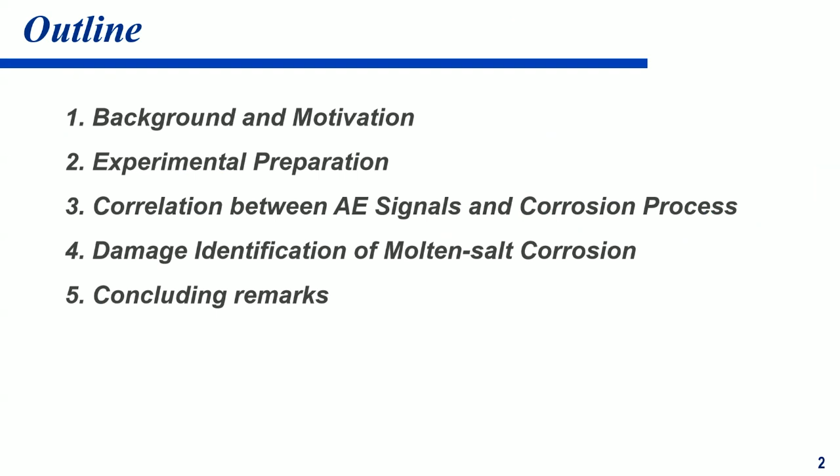Firstly, I will show our background and motivation behind monitoring the molten salt corrosion, and then I will introduce the experimental preparation of the monitoring system. Then I will give the relationship between the AE signals and the corrosion process, demonstrate the damage identification of molten salt corrosion. Finally, I will give the concluding remarks.

As we know, the molten salt thermal storage technology originated in the 1960s in the United States. China since introduced this technology and constructed numerous plants. And the high temperature molten salt technology is in high demand for applications, including molten salt reactors, concentrated solar power plants, and the flexibility retrofits for thermal power plants.

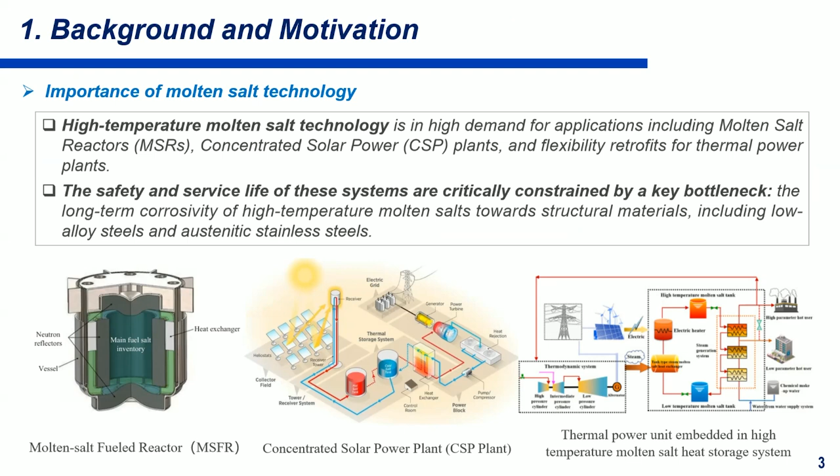The safety and the service life of these systems are critically constrained by a key bottleneck, namely the long-term corrosivity of high-temperature molten salts towards structural materials, including low alloy steels and austenitic stainless steel.

Molten salt storage tanks operate under harsh conditions. The material of the molten salt tank with a lower temperature of 290 centigrade is Q345R. With a higher temperature of 565 centigrade, 347H. The latter lies within the sensitization range. It is a large structure with numerous complex welds and designed for 25 to 30 years. It is hard to apply inspection in service.

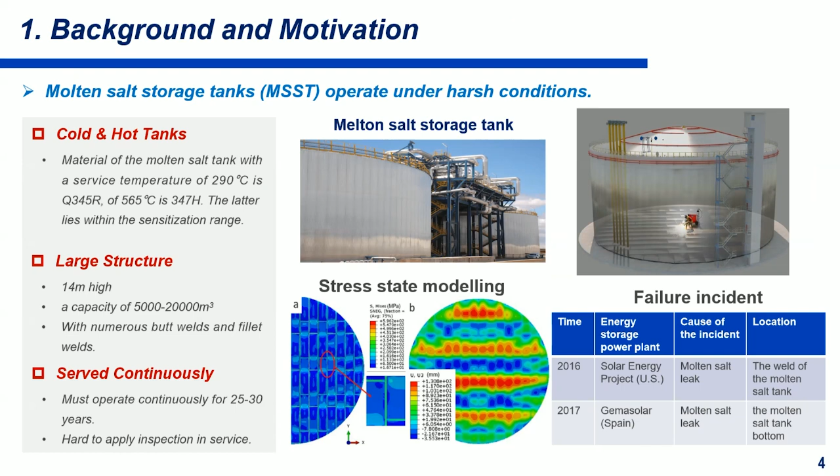So we do the research on in-service monitoring. Monitoring damage during service of the molten salt tank is a major challenge, and acoustic emission technology can offer in-situ, real-time, and continuous damage monitoring.

But there are also some challenges. The first one lies in extracting the signals in the very complex, noisy environment. And the second one is how to assess the damage of the material in the molten salt environment.

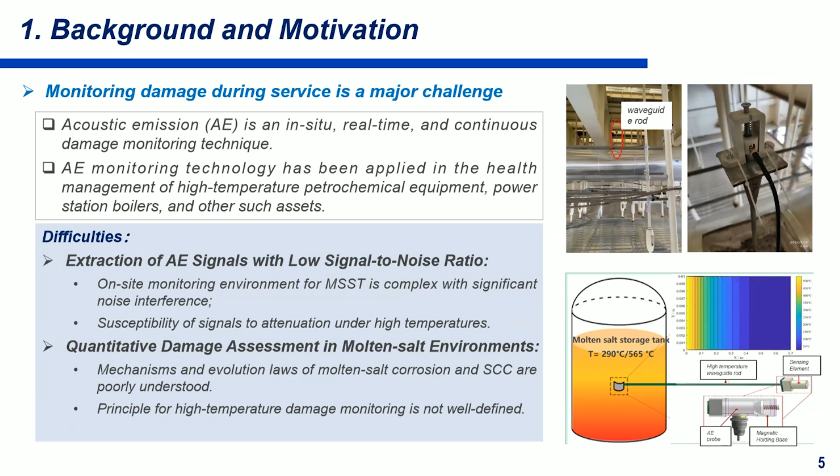It is very hard. And we construct a molten salt corrosion AE monitoring system, just like this. And this is a design drawing. And we use a waveguide rod so that the temperature is not very high for the AE sensors. The unprestressed and prestressed corrosion specimens were fixed to the waveguide structure using bolts and nuts, respectively.

The material of the high temperature waveguide rod must be consistent with that of the molten salt storage tank to prevent galvanic corrosion. The required waveguide rod length was calculated using the heat conduction equation that accounts for convective heat transfer.

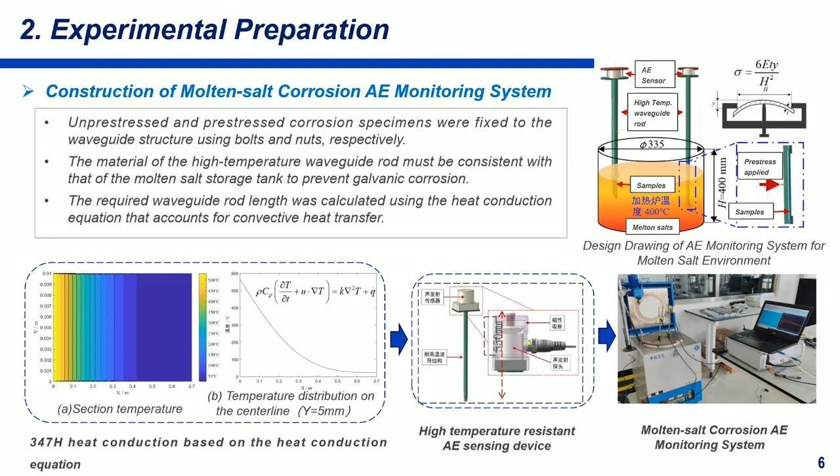When we apply the molten salt corrosion test, the corrosion mass loss of 347H under different stress increased rapidly initially and then slowly with time, with the overall trend approximately a parabolic curve.

The corrosion rate of 347H under different pre-stress initially increased rapidly, then decreased quickly, followed by a slow decline, reaching a peak around 250 hours. During the initial stage, the unstable oxide film accelerates corrosion. The slowing increase in corrosion mass loss and the decrease in corrosion rates after 250 hours can be attributed to

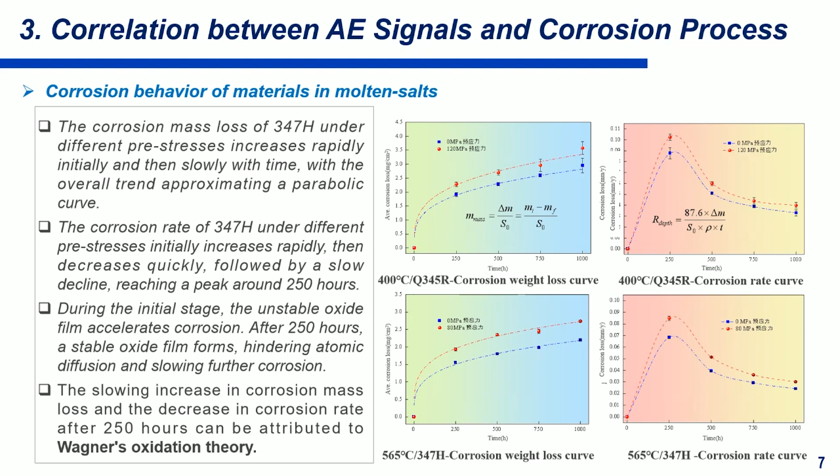Wagner's oxidation theory. As shown in Figure 1 and Figure 3, the data for corrosion mass loss versus cumulative energy were fitted using different models. For the 0 megapascal and 120 megapascal pre-stress conditions, linear and nonlinear equations were applied respectively, yielding coefficients of determination of

0.957 and 0.978. In contrast, linear equations were used for both the 0 megapascal and 80 megapascal conditions, resulting in R square values of 0.972 and 0.947 respectively. All models indicate a good fit and positive correlation between the variables.

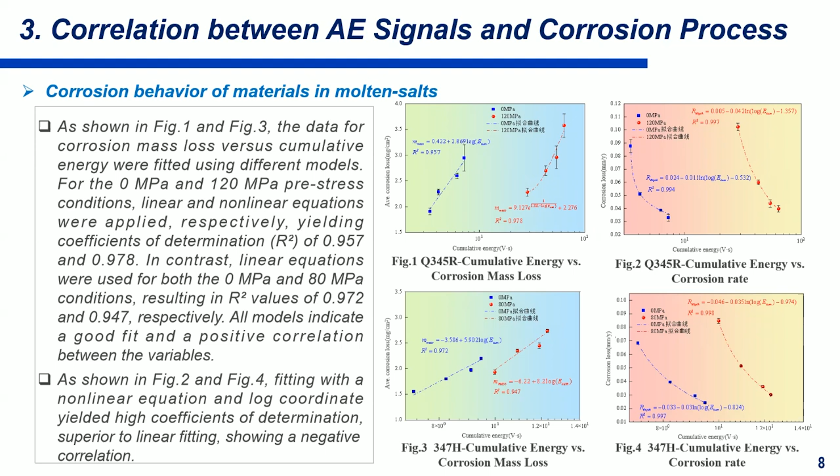As shown in Figure 2 and Figure 4, fitting with a nonlinear equation and log coordinate yielded high coefficients of determination, superior to linear fitting, showing a negative correlation. And there are three stages in this test.

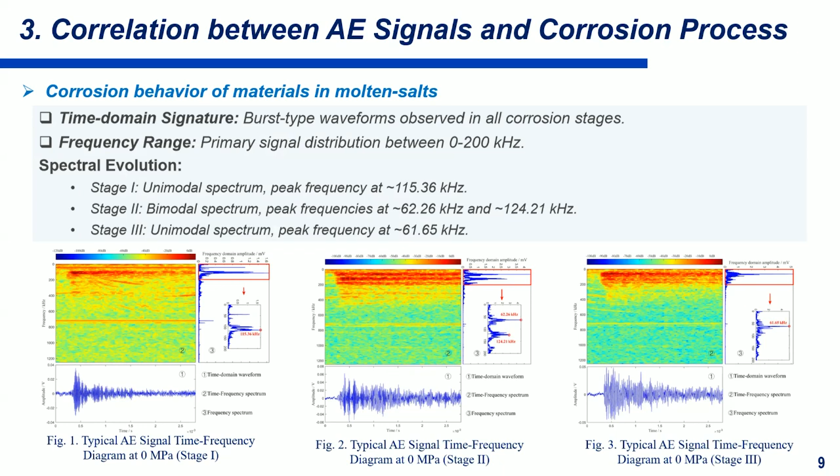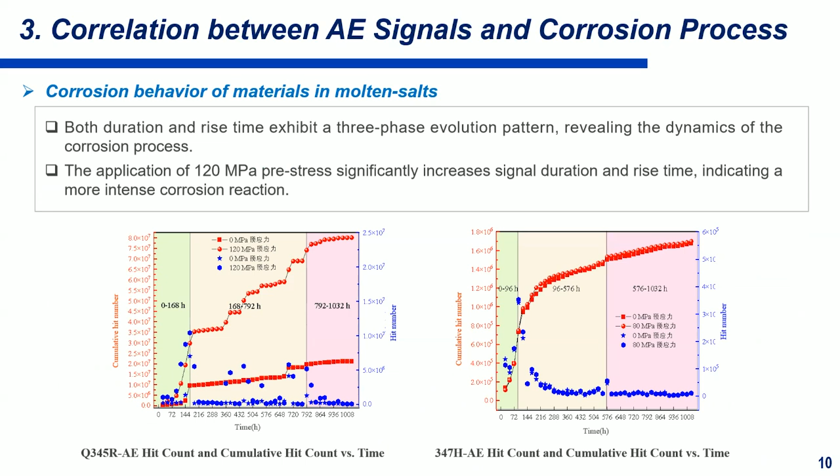Both duration and rise time exhibit three-phase evolution patterns, revealing the dynamics of the corrosion process. The application of 120 megapascal pre-stress significantly increased signal duration and rise time, indicating a more intense corrosion reaction.

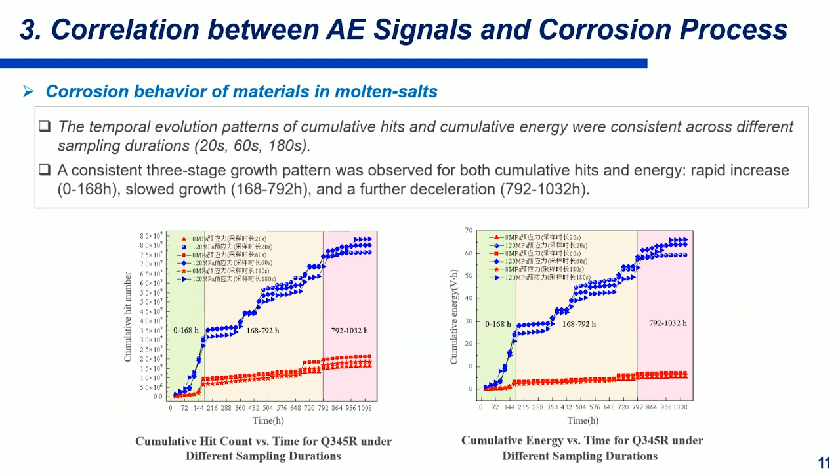The temporal evolution patterns of cumulative hits and cumulative energy were consistent across different sampling durations, namely 20 seconds, 60 seconds, and 180 seconds. A consistent three-stage growth pattern was observed for both cumulative hits and energy: rapid increase, slow growth, and further deceleration for 792 to 1032 hours.

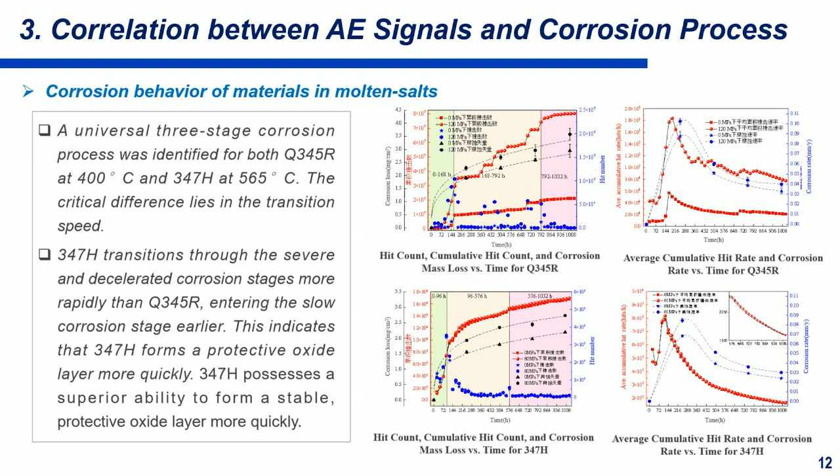A universal three-stage corrosion process was identified for both Q345R at 400 centigrade and 347H stainless steel at 565 centigrade. The critical difference lies in the transition speed. 347H stainless steel transitions through the severe and decelerated corrosion stages more rapidly than Q345R, entering the slow corrosion stage earlier. This indicates that 347H possesses a superior ability to form a stable protective oxide layer more quickly.

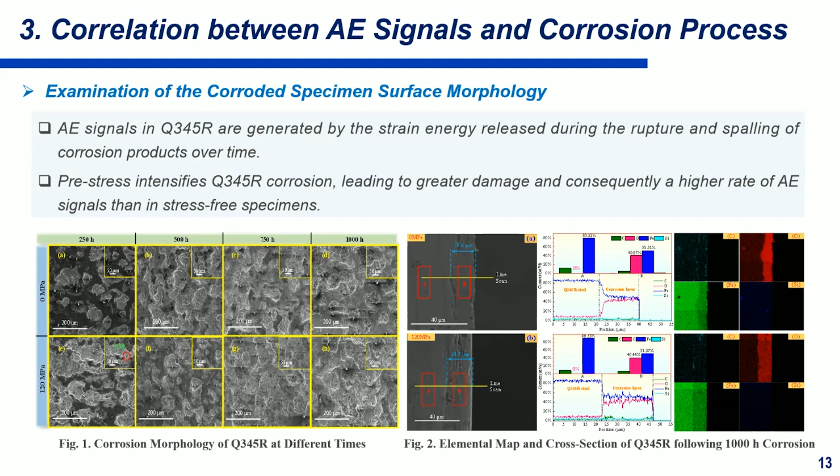When we check the morphology of the corroded specimen surface, AE signals in Q345R are generated by the strain energy released during the rupture and the spalling of the corrosion products over time. Pre-stress intensifies Q345R corrosion, leading to greater damage and consequently a higher rate of AE signals than in stress-free specimens.

And when we check the relationship between the AE signals and the molten salt corrosion, the energy release rate of the unstressed specimen remained at a low level during the 0 to 480 hours period. At this stage, a relatively complete protective oxide film may form on the material surface, resulting in slow corrosion progression and no strong AE source.

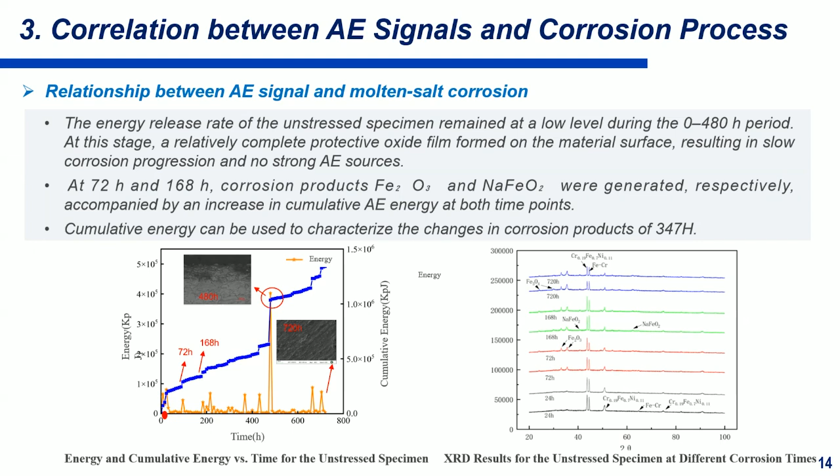At 72 hours and 168 hours, corrosion products, iron oxides and sodium iron oxides, were generated respectively. Cumulative energy can be used to characterize the changes in corrosion products of 347H stainless steel.

Classification of AE signals in molten salt corrosion stages based on AE characteristic parameters. The molten salt corrosion process of Q345R steel at 400 centigrade was divided into three typical stages. A total of 1,500 burst type signals were equally selected from these stages, with pre-trigger data retained and no overlap between signals.

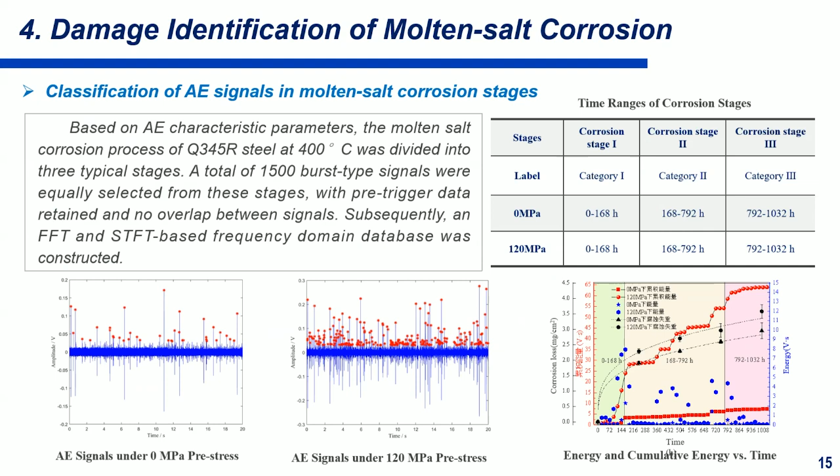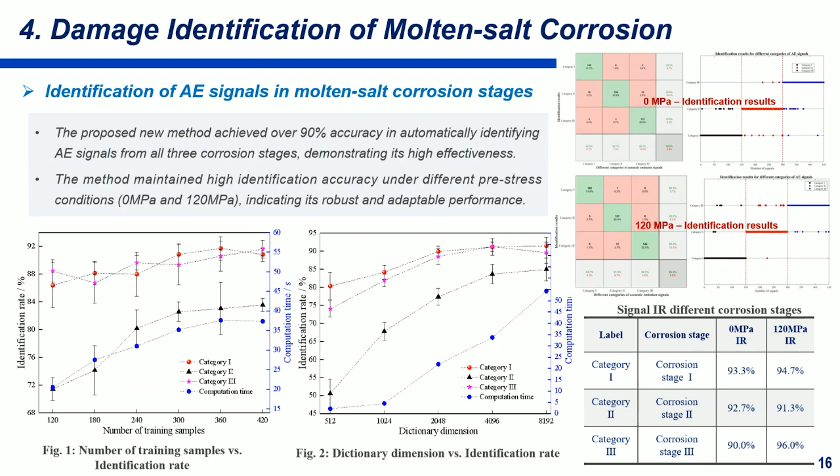Subsequently, an FFT and STFT based frequency domain database was constructed. The proposed new method achieved over 90% accuracy in automatically identifying AE signals in all three corrosion stages. The method maintained high identification accuracy under different stress conditions, indicating its robust and adaptable performance. Now, the concluding remarks.

A robust correlation was established between the AE parameters and the three stages for both materials in molten salt, confirming AE's efficacy for in-situ monitoring. Applied stress significantly intensifies corrosion activity and AE signal generation, with stressed specimens exhibiting greater damage, higher cumulative hits and energy compared to their stress-free counterparts.

A sparse representation-based method successfully identified the corrosion stage with over 90% accuracy, demonstrating a novel data-driven approach to quantitative damage assessment in molten salt environments.

The developed AE monitoring system and damage identification method provide a viable foundation for the integrated management of critical components like molten salt storage tanks in concentrated solar power projects, molten salt reactor systems, and flexibility retrofitting for thermal power plants.